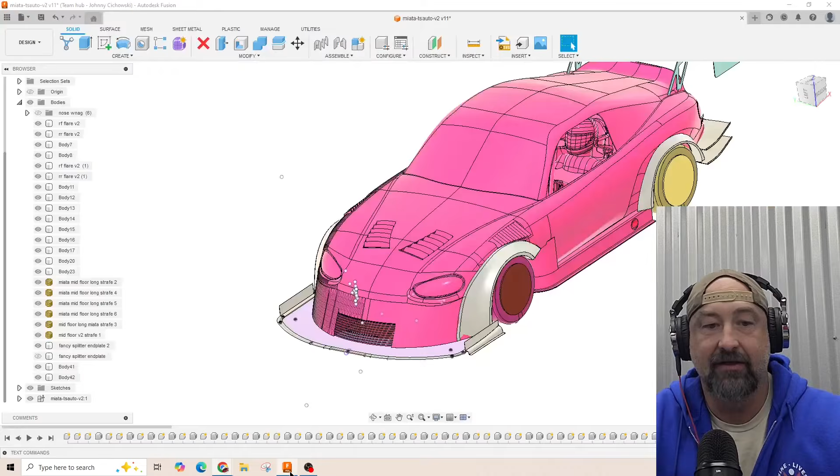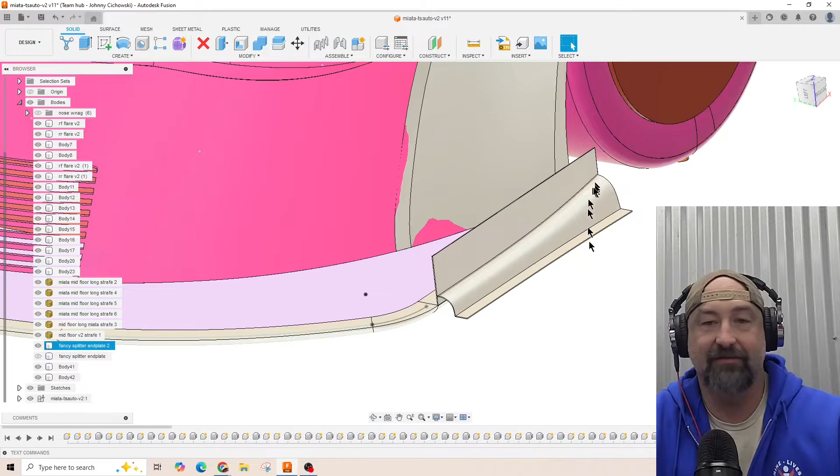Are these various kinds of splitter end plates worth a damn? Should you get them? Let's find out. Let's get into the nitty gritty. So this is the test. What these things are is a vortex generating splitter end plate. It's got a curve on the outside of the splitter end plate. It balloons in the rear, and what happens is that air trips over this top line, nabs this air that's being accelerated out of this venturi, out of this tube that gets bigger, and then they grab together and they spin. So that's the idea of how these splitter end plates work.

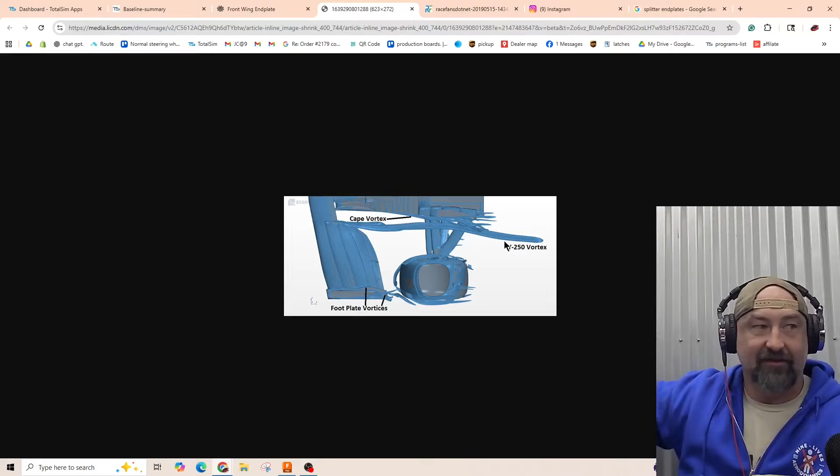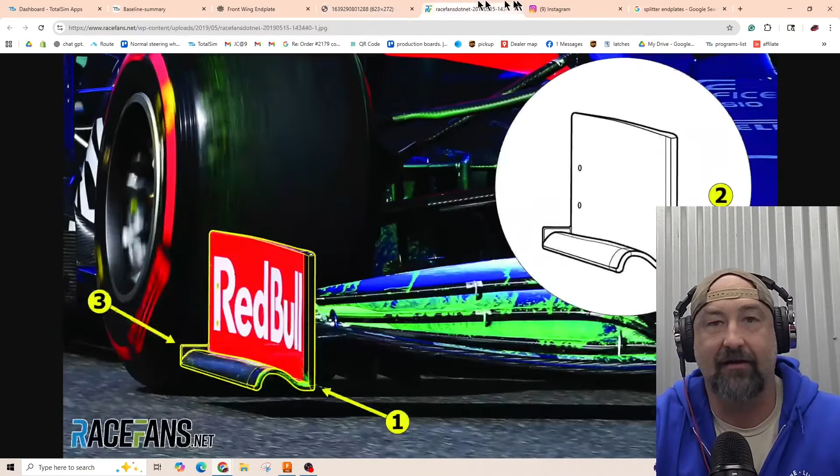And I do. So basically when air hits this thing, it'll actually flow around till about here, and then after that it's an absolute mess because you got this spinning tire, brake air coming out this way, brake air getting jammed in this way, everything spinning and churning up. The air coming off the backside of this tire is so useless that you can't use it. As an aerodynamic guy, we know that the tires are super dirty and we got to do everything in our power to avoid it. So that's where these vortices come in. You make a vortex with some spinning air, and you can seal off the floor. So there's a really good example of the Y250.

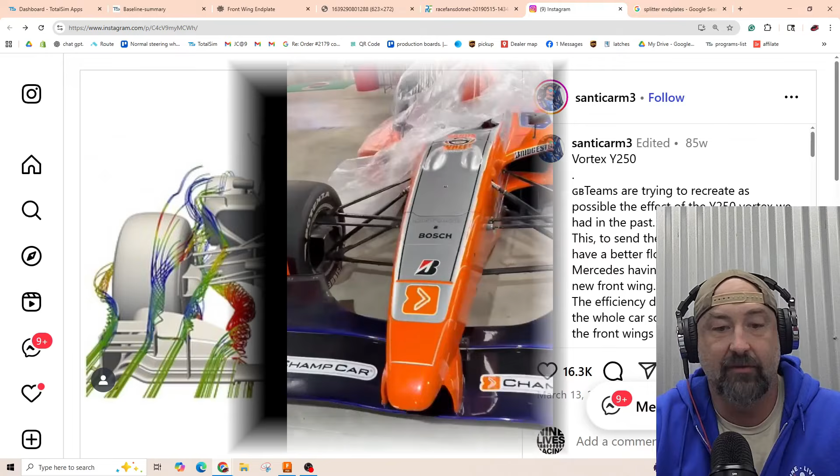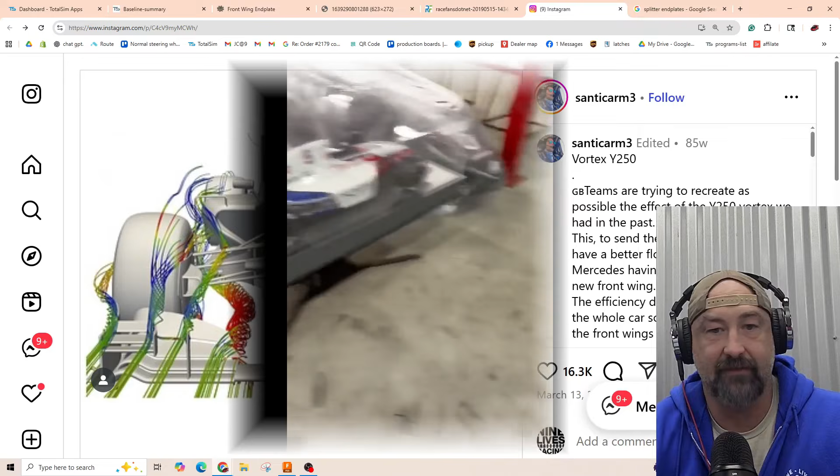Now, I've seen these kinds of splitter end plates used on wings on Indy cars, which I'm going to throw some B-roll in for right now. Basically, the wing was only allowed to be as wide as the space between the front tires. So they created a vortex on those end plates so it could protect the floor and make the floor work, because that's a formula car. That's how formula cars get all their downforce, by generating downforce on the floor.

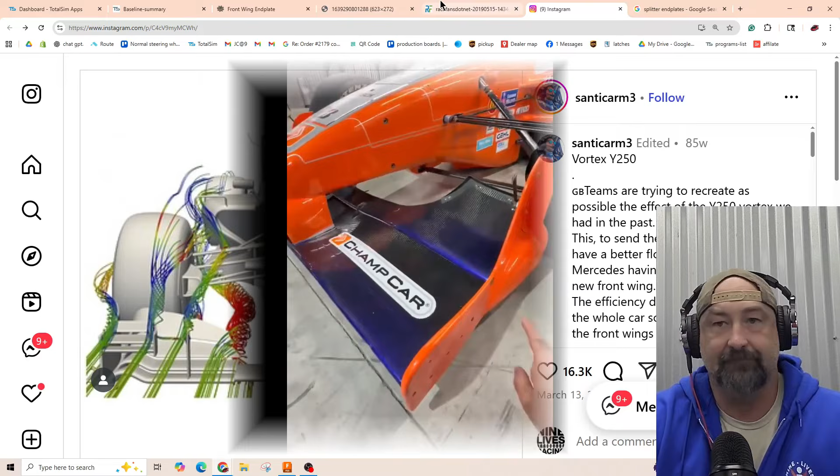Now our problem is, should we be putting these Formula One-esque or IndyCar-esque parts on GT cars? Because you as a club racer running GridLife and NASA, you have a fender covering that tire. So we don't have the messy tire nearly as bad as the other cars do, and this is sitting on the outside of the tire, so it's not going to seal it. So what benefit does it have for us? Why are these popping up all of a sudden? So let's just jump right into the test and go for it.

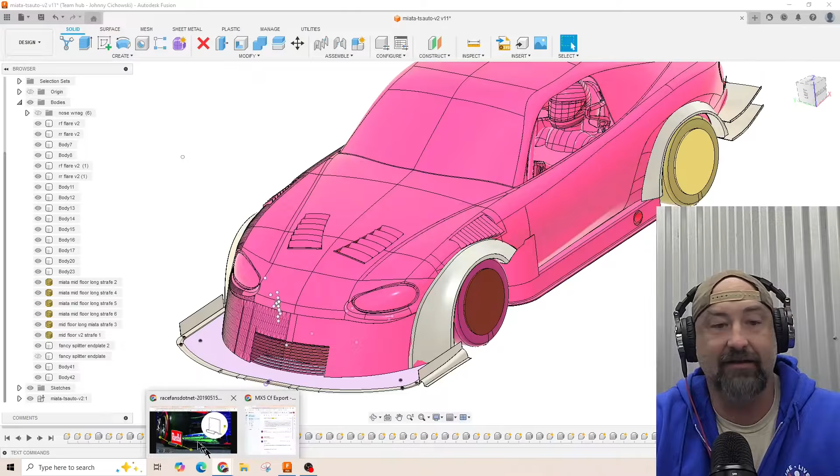So this is our CFD runs. TotalSim is our preferred CFD service of choice. They are a CFD service founded by an ex-Formula One aerodynamicist. So you're not going to get any better CFD than running this. Whatever they do is going to be more accurate than some kid trying to get his calibrations right. That's just the way it is.

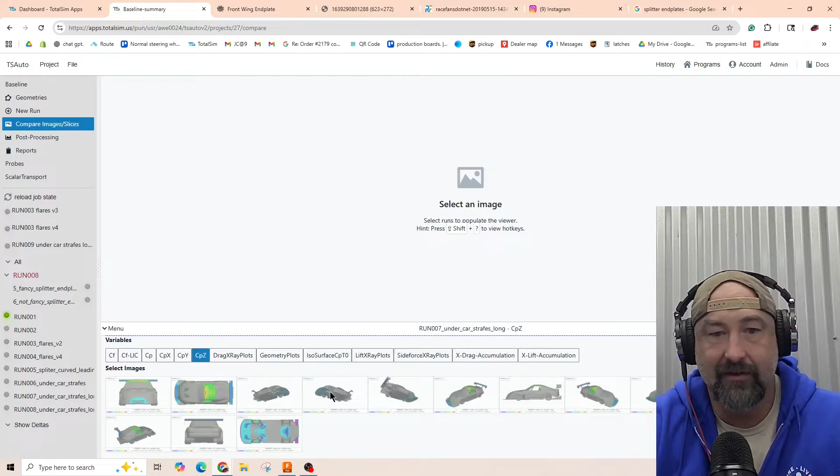So the first thing that I found interesting was our drag, our drag attachments. And of course, Caleb sends messages in the middle of the videos. So basically we run our run without anything on it. This was our previous run with the strakes. Then we're going to add what I call the fancy splitter end plates. You can flip back and forth here and see this air. All this red is detached air. That's the air that's hit something and now is not attached to the car anymore.

You know, you got it coming off the windows, off the back, off the wing, that kind of stuff. And you can see right here, we have a decent amount of detachment at the front of the car. And I've turned that on, and all of a sudden there's a vortex right there. So there's some detachment going on right at the front of that splitter end plate. And you can see right there a whole bunch of no attachment and attachment as soon as we add those fancy splitter end plates. So that's kind of good news number one.

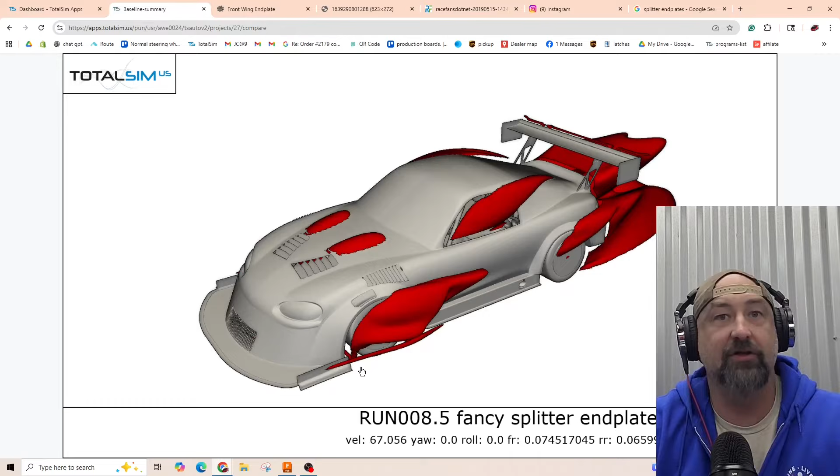Let's jump to number two. These are just squares, and this could be anything that you could build in your garage at night. You don't need any fancy tools. Just put a little wall on the edge of your splitter. And you can kind of see here, the detachment zone is essentially the same. Actually, it's even better with the standard end plates. So that's something to be considering.

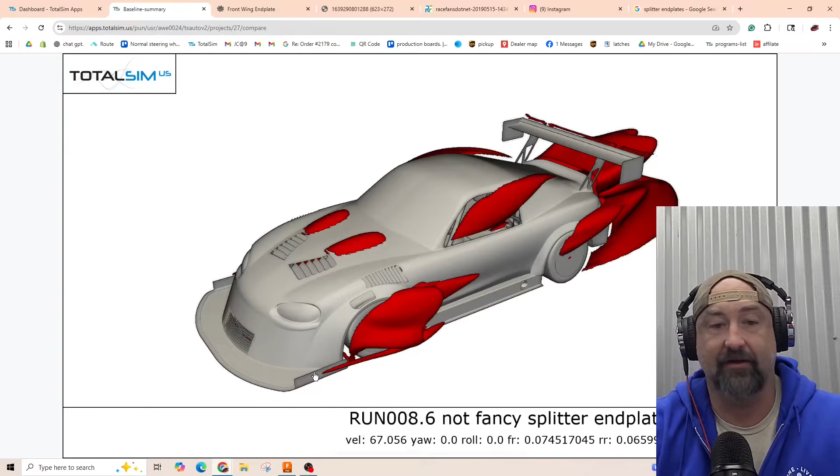So now let's jump into the wings. The wingenards, we call them. Same thing. It's good. The detachment is getting smaller. It seems like it's really helping the air stay attached to the sides of the car. So if you want to do some exhaust modding or put some kind of fancy side skirts over here, that's actually helping the air stay attached as opposed to that.

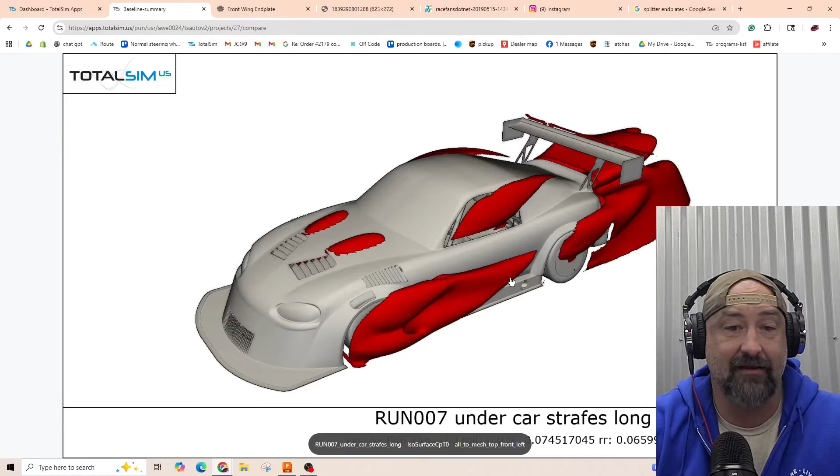Now, let's see what else we got going on here. I want to jump into the X-ray plots. This is basically a top-down view of all of our runs, as if you were seeing through the car like an X-ray. As soon as we add those splitter end plates, watch this area right here, that splitter area fires up. So right there, there's nothing. The sides of the splitter aren't doing anything. Boom, purple everywhere. Now it's picked up some downforce right there. And boom, picked up some downforce.

Now let's go to the regular squares. Almost the same. The downforce images and where the downforce is being delivered to is almost identical to that. So yeah, you got nothing. Boom, just the little walls.

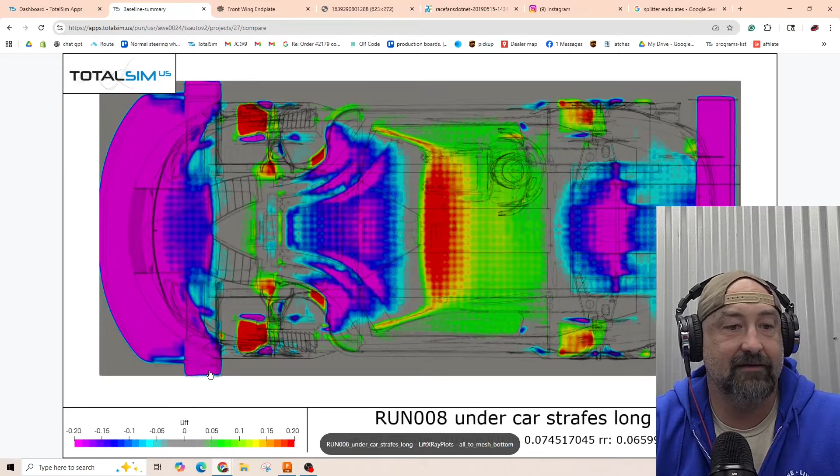Now let's jump into the wing itself, or the wingenards. So this is essentially, we just put an entire wing through the front of the car, and it's picked up a whole bunch of downforce on these sides. You can kind of see this little purple area right here, is kind of like a remnant from when we had no splitter end plates. So I'm thinking that you want to attach that wing to the splitter, and that would solve that, and you'd end up picking up even more downforce down here on the wing.

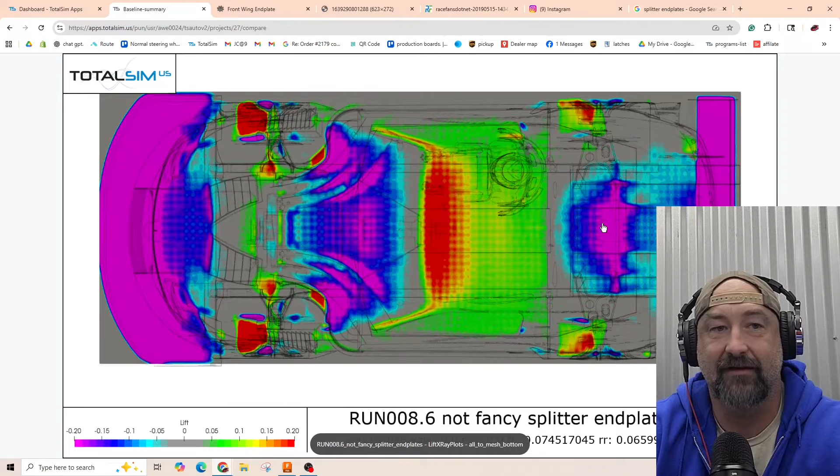So one thing I can point out is when we go from nothing to the wingenards, or to the fancy splitter end plates, the area in the diffuser gets smaller. So splitter end plates, fancy splitter end plates, nothing. Where'd it go? Fancy splitter end plate, nothing, fancy, nothing, fancy. You're watching that diffuser area get smaller.

Also, I'm watching this lift area on the top of the car get bigger. See that? It gets bigger a little bit right there. So it's actually making some lift off the roof. It's sending more air over the top of the car, and it makes the roof make more lift. That's how it goes.

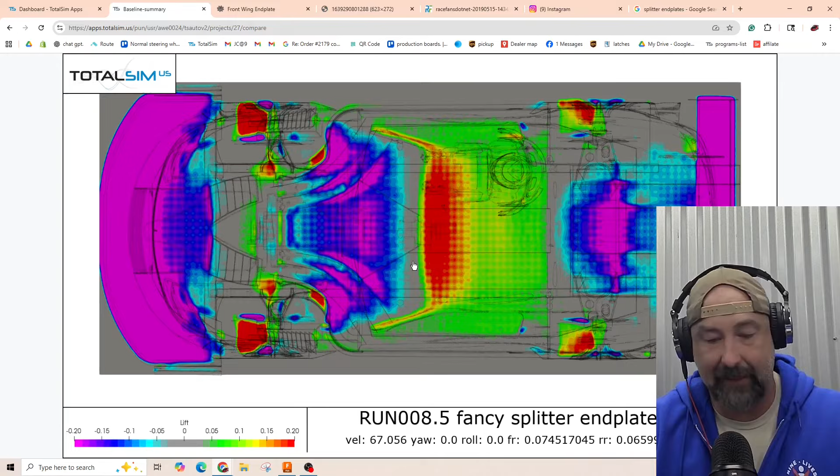So cool. The other thing, jump on our CP plots, check out our underbody aero, because that's what these things are supposed to be making better. So we go from nothing, add the fancy splitter end plates, and you can see this area right here gets way bigger. So that grows a lot. The corners here start getting a bunch of blue into it. There it is. So that blue starts popping up.

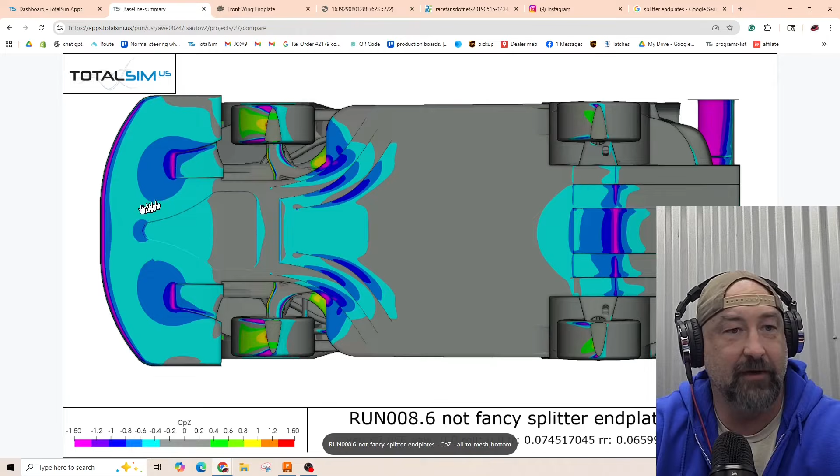Now let's jump to the not fancy. Still good growth. These areas didn't connect, and we are still having a little bit of disconnect here. But you can see going from nothing to the fancy, the diffuser area is getting smaller. So it is attacking the diffuser, making the diffuser run less well.

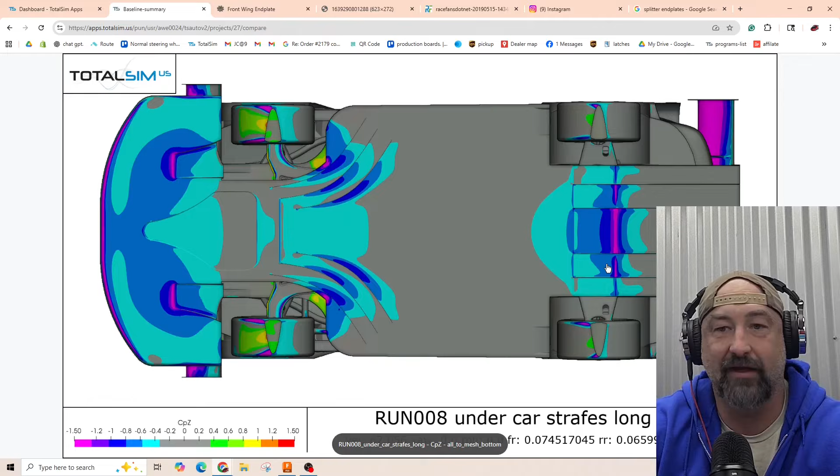And then let's check the wing. The wing actually has the best. It looks like the diffuser area stays the same size between the wing and no splitter end plates. So we're not losing any rear downforce on here.

So let's jump into the numbers. Let's figure out exactly what we got going on here. Jump on our baseline. These 4 runs were our runs. I'm going to make this bigger so you can see the numbers, because this is the moment of truth. This is going to tell us everything. So I'm going to select our base run, and I'm going to highlight the not fancy splitter end plates. And you can see here, drag picked up 31 pounds, downforce picked up 17 pounds.

So it's a hurt on our lift to drag ratio, which is something that I don't like. But you can see here, front downforce picked up 56 pounds and rear downforce lost 38 pounds. So it ended up losing a decent amount of rear downforce. So if you wanted to shift some balance forward, splitter end plates are your way to go. But they are draggy, so be careful there. Now let's check out the fancy ones.

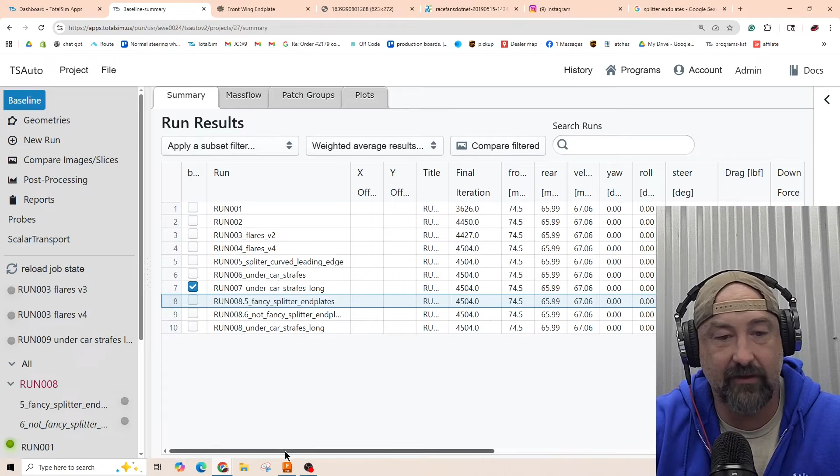Downforce only gained 35 pounds. That's kind of similar downforce numbers to putting a hood vent in. It kind of gets you 35 pounds, but with worse drag. So we got 32 pounds of drag. It's kind of a wash on our lift to drag ratio. You're going to need more power to move this thing the same speed, just because our drag's coming up and our downforce is kind of meh.

But here's something I do want to show off. Front downforce gain was 83. Rear downforce loss was 47. So we had the highest rear downforce loss with using those fancy splitter end plates. Front downforce picked up 83, which is a decent amount of shift. I'm going to get into the actual percentages of the shift right after this.

And then this run here I selected is the wing, and we have 141 pounds of front downforce total increase, which is not bad. On a car where we've already found the majority of the low-hanging fruit for downforce, here we find 141 pounds, which is not bad at all. That's good even. As a driver, you'll notice about an 8% change. I say about 7. As a pro driver, you're going to feel about 3.5%.

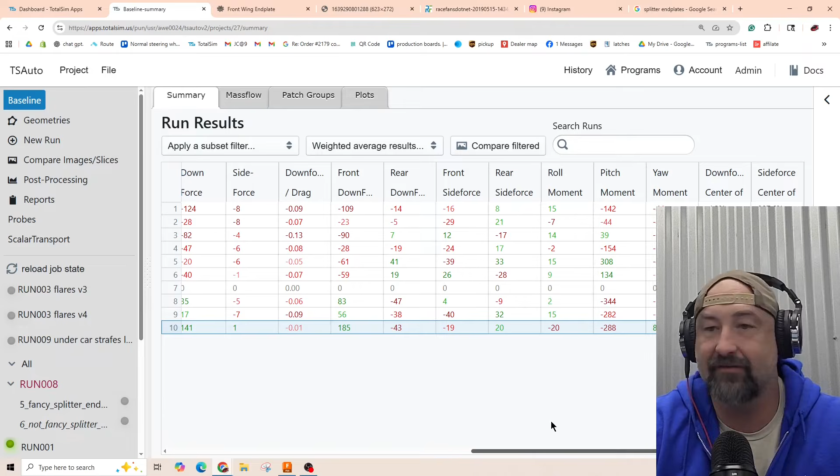And I do want to move this because I want to look at balance. So let's go ahead and turn off this little check mark that makes everything relate to the previous post. All right, so here's our base downforce center of balance was at 42%. I ran that car at 42%. Was pretty happy with it. The front end definitely needed a little bit more downforce.

Adding the fancy splitter end plates shifted us to 47.3%, and then adding just regular squares shifted us to 46%. So if you don't want to spend it, it's only a 1% change between the two. If you're looking to get more front bite and shift some balance, throw a little square on the edge of your splitter, because that's the majority of what we got going on here. We picked up a little bit, got a decent amount of shift. There's only a 1% difference in balance between the two.

And then here, 50. That's the magic number. We have a 50-50 balanced car. We want to see 50% balance on it in aero. Boom, magic number right there, 50%. I'm going to try a few more things before I cut up my bumper and stick a wing through the middle of it, but this is promising. This is something I really like to see.

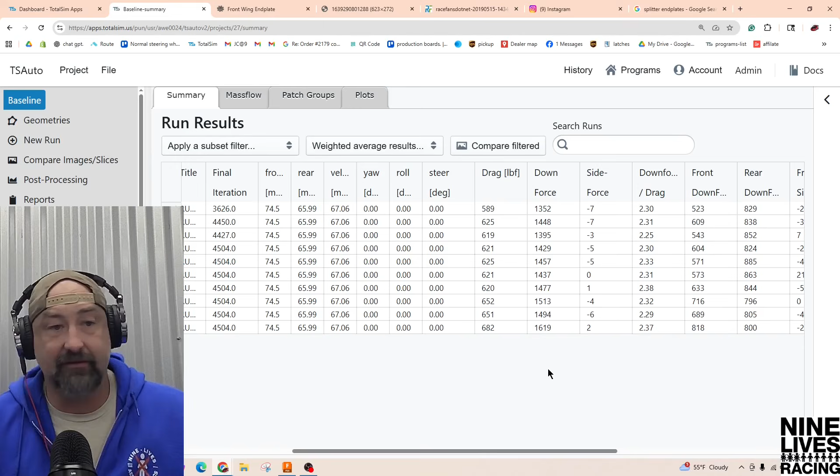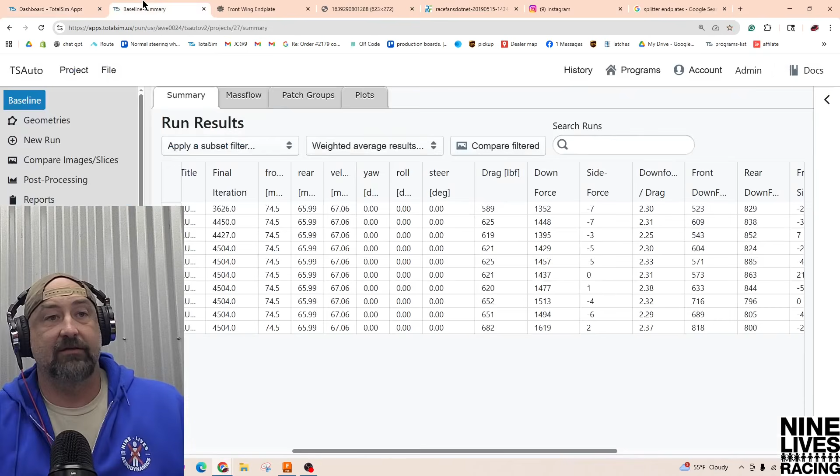Is it worth it? Let's go ahead and end this video. Is it worth it to buy the fancy splitter end plates when the alternative is to go in your garage and put them on? I'm not sold that they are. They got a lot of downforce shift. They both did. How much are these guys? That's 750. These are 375. Am I going to spend that kind of money to get that shift when I can just run our $50 splitter end plates or build your own? No, I'm not. I'm gonna stick with those.

Yeah, the vortices and the air getting stuck to the side is its own thing. If I got some parts down the sides of the car that I want to work, then I'm gonna do that. Otherwise, I don't really see that big of a deal in it. I just don't. So that's the test. That's the run. Stick a wing through the side of your car. That seems to be doing the best.